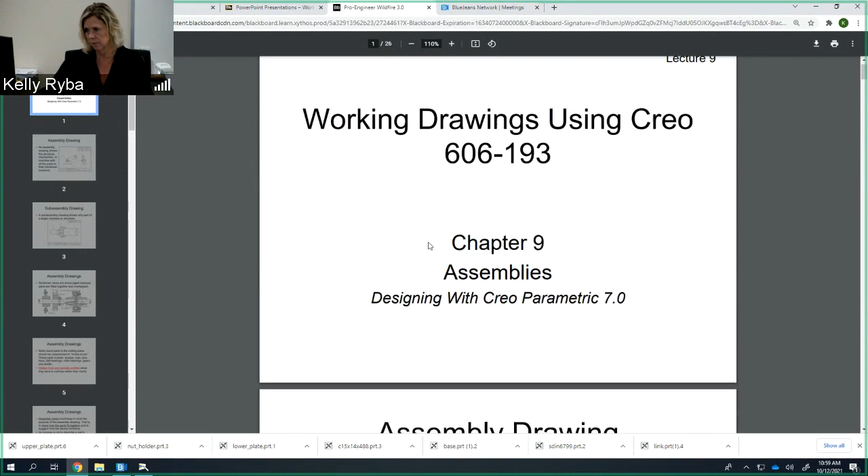If you want to open up to page 287, which is the start of this chapter, we're going to be looking at kind of section by section of what we see here. First of all, an assembly drawing is going to show how parts are put together to accomplish a function. So an assembly drawing here is going to show multiple parts put together. It's going to list what they are. We're going to have balloons so we know in relationship to each other where they're at, what their part number would be, and how many of them we're going to need.

We're actually going to be putting the swinging link together as our first tutorial in our chapter here, chapter 9.

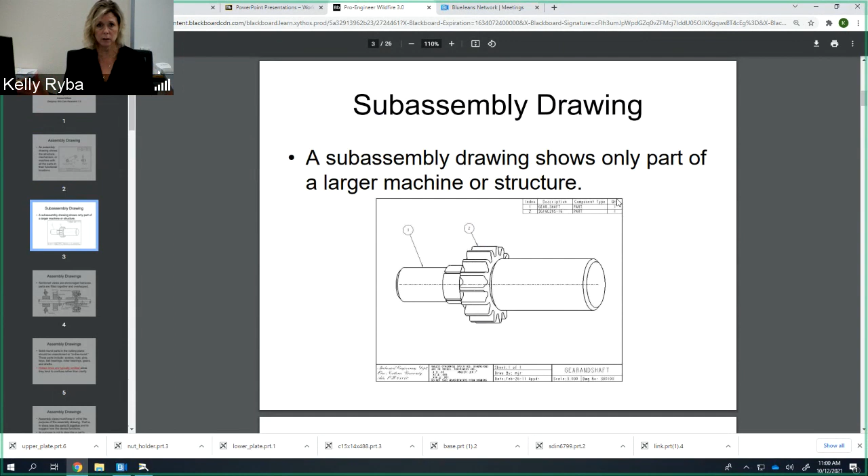Now, a sub-assembly is going to be looking at maybe a small chunk of a bigger part. So maybe we can put together a couple of small sub-assemblies before they actually get put into their final form to ease manufacture or assembly of the full amount. So sometimes when we have really large machines, we break it into sub-assemblies before it actually comes together to make the full machine assembly. Sub-assemblies are going to show a couple of parts or a section of a machine which then goes into a larger portion.

Now, assembly drawings can be sectioned so that we can see internal features. This particular chapter 9, we don't go quite that far. We're just looking at, okay, let's bring all those parts in, let's make sure we know how to get them oriented where they need to be so that we can have parts that are working together. But this is going to go that step further when we start putting them on borders and we start ballooning, looking at whether we can see all the parts that we need to. And if we can't, we may need to make sections so that we can see and balloon parts that would be internal to it.

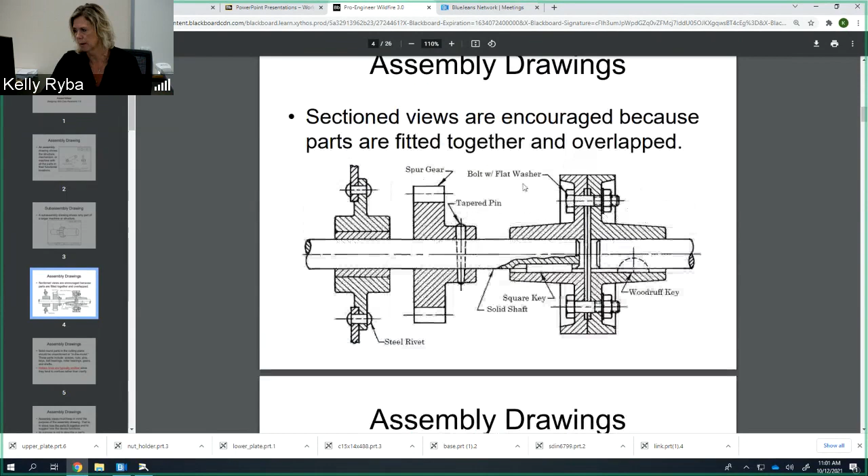Now, assembly drawings with solid round parts - for instance, if I have a shaft that is going through an assembly, and let's say I section through it, we do not use section lines on long extended cylindrical parts. And also things like screws, nuts, pins, keys, ball bearings, roller bearings, and gears as well. These are things that are kind of part of that dimensioning standard. We'll continue to practice these things as we go along.

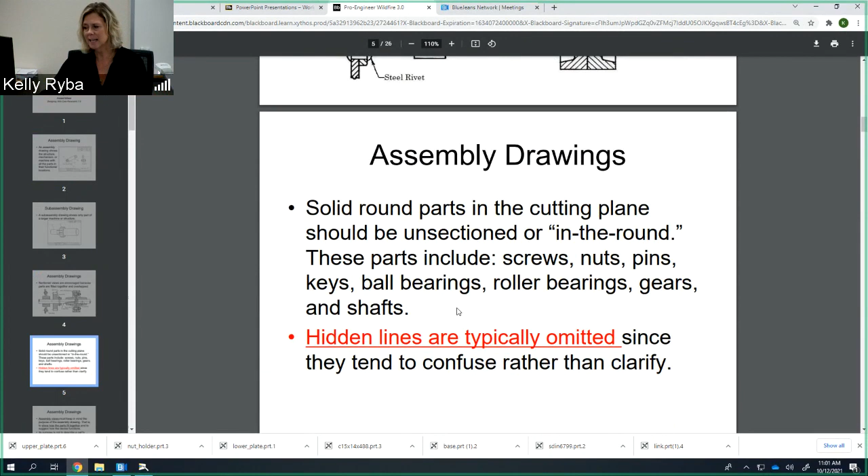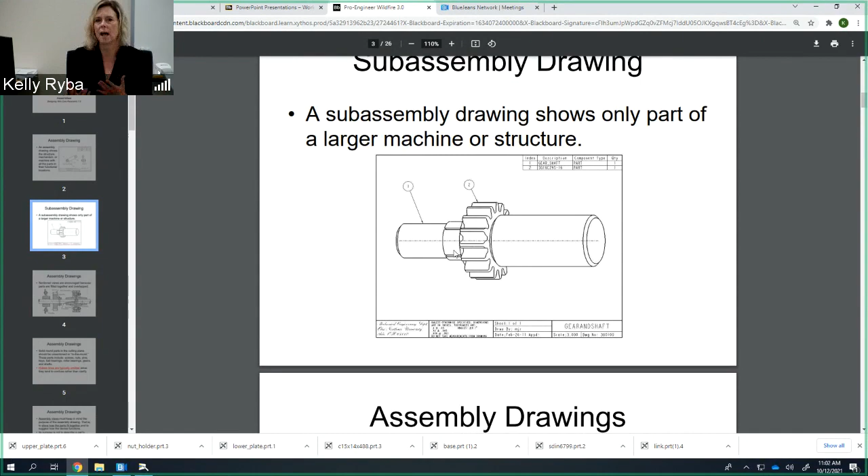Typically hidden lines are omitted, since they tend to confuse rather than clarify. If we start putting in all the hidden lines because we have multiple parts together, it would actually start to look kind of like a mess. So we normally will take out all of the hidden lines in an assembly view, and then if it seems like maybe we need to put a couple back in, we do it on an individual basis if it's going to add clarity to the drawing. But if it doesn't add anything, we leave them off. So the default is really to leave them off, but there's not a standard that says no hidden lines on assemblies. We only add them if they add value and clarity to the actual assembly itself. That's why it says typically omitted.

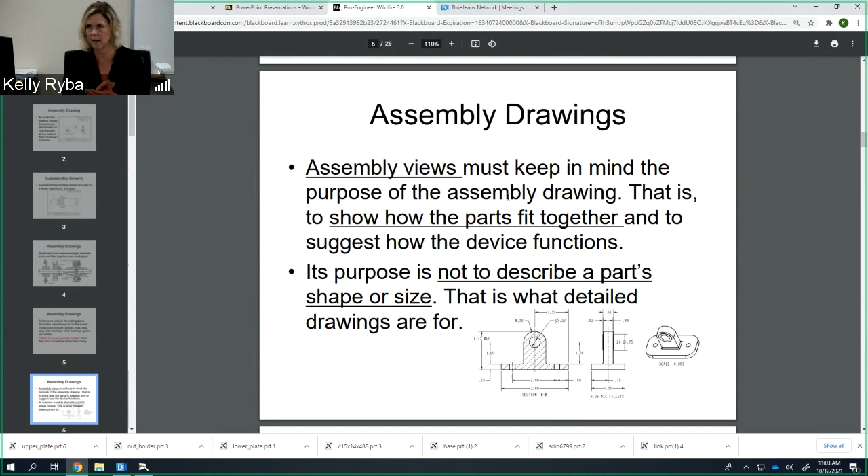Now, different types of assembly views - keep in mind that the purpose of an assembly drawing is to show how parts fit together and to suggest how that device is going to actually function. Its purpose is not to describe the individual parts. So there are no dimensions for individual parts on an assembly drawing - that's your detail drawing, which was what we looked at in our first Creo class. Now we're going to start saying, okay, we want this and this part to come together - how are they oriented to one another? That is the purpose of an assembly drawing, not to say that hole there needs to be a half inch, and what is the tolerance on that. That's detail drawing stuff - that's individual part stuff.

Dimensions are not given on an assembly drawing unless it is needed at assembly, for instance if there's some sort of a dimension that something needs to be adjusted to, that can be on an assembly after all the parts come together. That's something that can be on assembly, but we are not dimensioning other parts and what they look like on that assembly drawing.

Sometimes, once we put all the parts together, we may want to know what is the overall length, height, or width of that particular assembly. That might be something that you add as a reference to an assembly drawing.

Parts are going to be identified on an assembly using balloons, okay? So circles that are containing the numbers, we call those balloons. They're going to point to the specific parts and identify them in what we call the bill of material.

Bill of material, balloons, section views are going to come after chapter 9. That's actually chapter 10 stuff, when we start creating the drawings, putting the bills of material on, and preparing our assembly drawings to be used on the shop floor. Right now, chapter 9 is how do I get all these parts together?

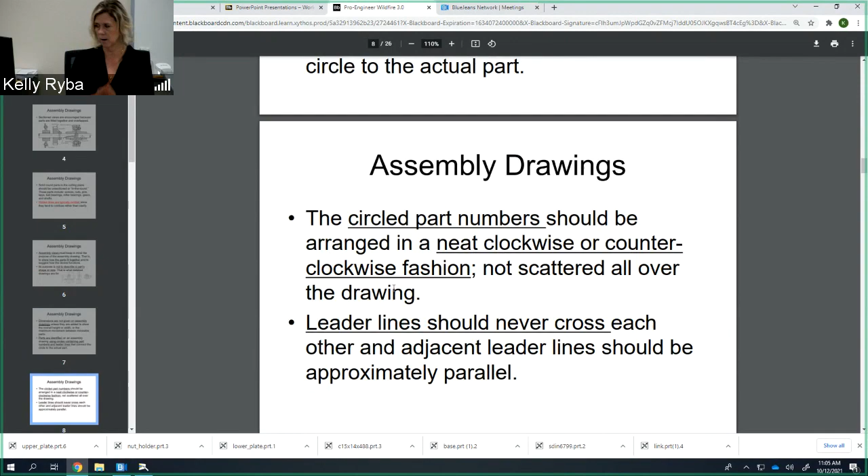Leader lines should never cross each other. So if it's a leader line coming from a balloon pointing to a part, no crossing of those, that's not okay. They should be, when appropriate, as parallel to each other as possible.

The bill of materials must be provided on an assembly drawing, as we talked about. It's not going to be the focus here of chapter 9, but it's going to be that listing of all the individual parts that we would have pulled in, which are now identified through balloons and then quantified on that bill of material.

The bill of material always needs to have that balloon number, the part number that we actually have on there, how many there's going to be, and then a description. Sometimes we put material on there. I'm not a proponent of that, because if you end up switching material, now you've got another place that it has to be identified.

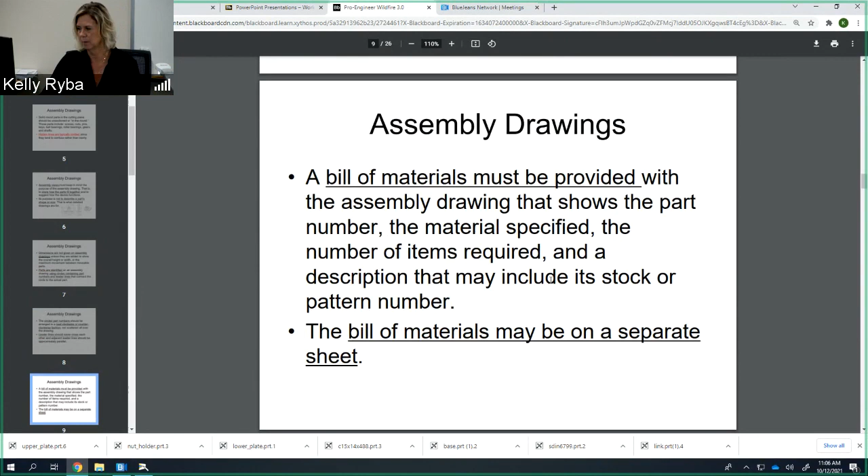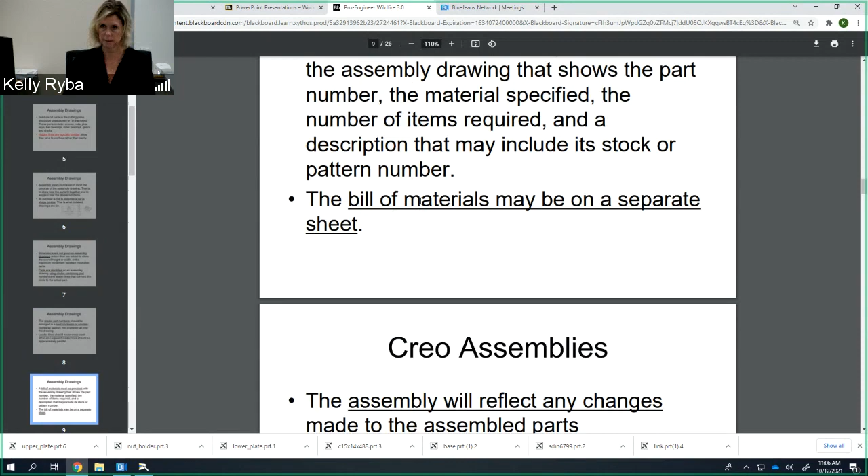We'll talk about the requirements. Bills of material can actually also be on a separate sheet of paper, but we're going to be creating ours so that they're right on the assembly drawing itself.

So in Creo assemblies, the assembly will reflect any changes made to the assembled parts. For instance, if any changes are done to the individual parts, they will be reflected in the assembly automatically. That's the parametric part of Creo parametric, meaning that wherever I make a change, that change is going to cascade over into all of the areas where that part is used.

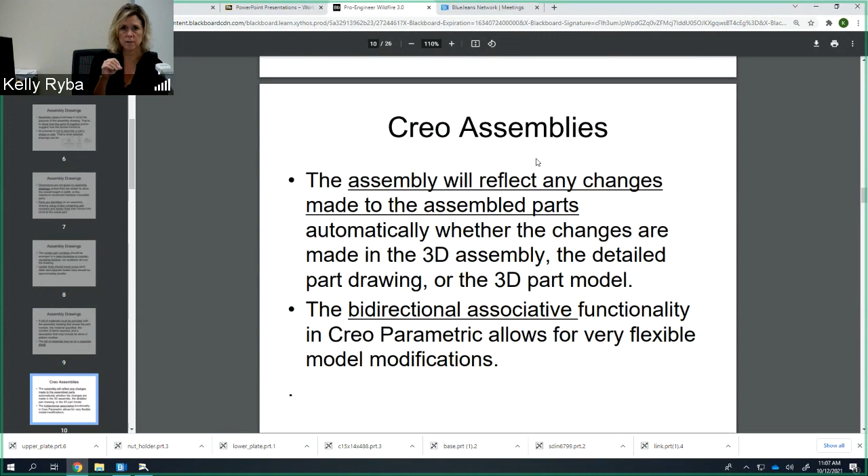Bidirectional associativity is also one of the functions of Creo parametric, and so we can make changes in the actual assembly, and they will cross over back to the detail drawings. That is one of the huge benefits of parametric software, is that ability.

The best way to assemble a machine or structure is to do it in the same way it's going to be assembled in the real world.

So you got to think about what is the first part I'm going to grab so that I can actually get things going. There's usually going to be something like a base piece, and that becomes the first number we assign on our bill of materials, so we create the bill of material in the order we're going to assemble it. That's what we do when we pull parts in. Understanding how parts are made and how they're going to be assembled, thinking about that assembly process is really important, because Creo is going to mimic that very same thing.

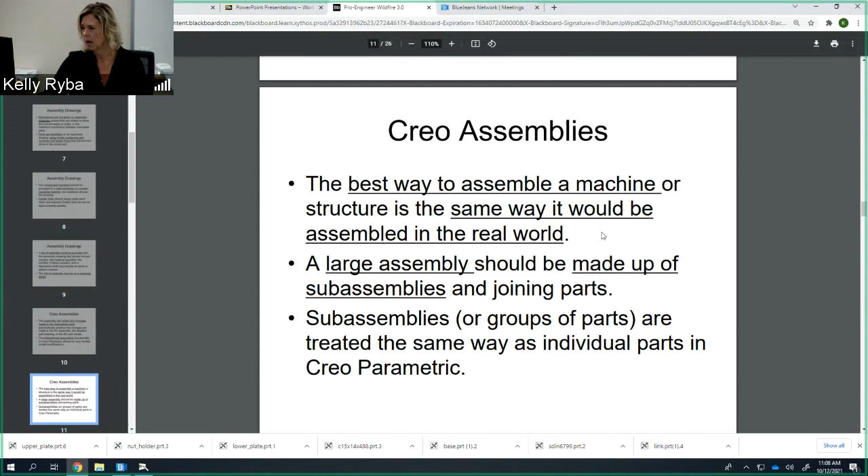Sub-assemblies or groups of parts are going to be treated the same way as individual parts in a Creo assembly. So if we bring a sub-assembly in, it kind of becomes its own part, and then we apply the constraints as appropriate for the positioning.

Parts may be colored in an assembly to help distinguish between them, and I'm actually going to demo that in our particular assembly today, so you'll see me do that so we can see that differentiation of the different parts.

All parts must be in the same working directory, we can't have parts off in different directories because it's always looking to that working directory. So when we start any session, just like it was for part generation, for assemblies as well, we're going to set that working directory right away.

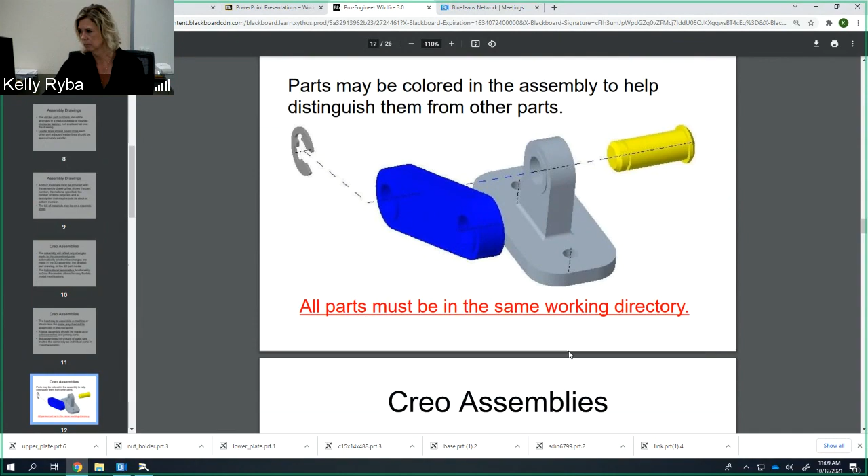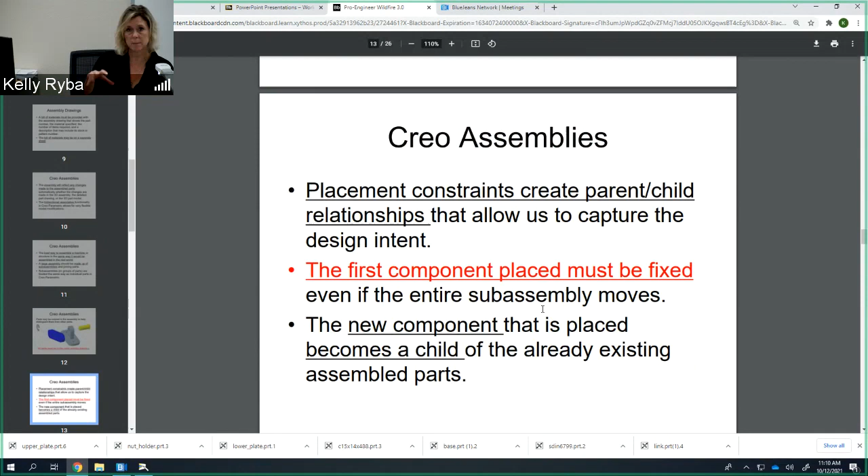Creo assemblies are going to have placement of constraints that create these parent-child relationships. So starting with that base piece, that first component has to be fixed in the assembly, even if it's moving in its final function. We'll see how we do that in each of the assembly tutorials. Then a new component is placed in and oriented to that base position, and it becomes, if you would, the child of that assembly. So the first component must be fixed, and I'll show you exactly how we do that.

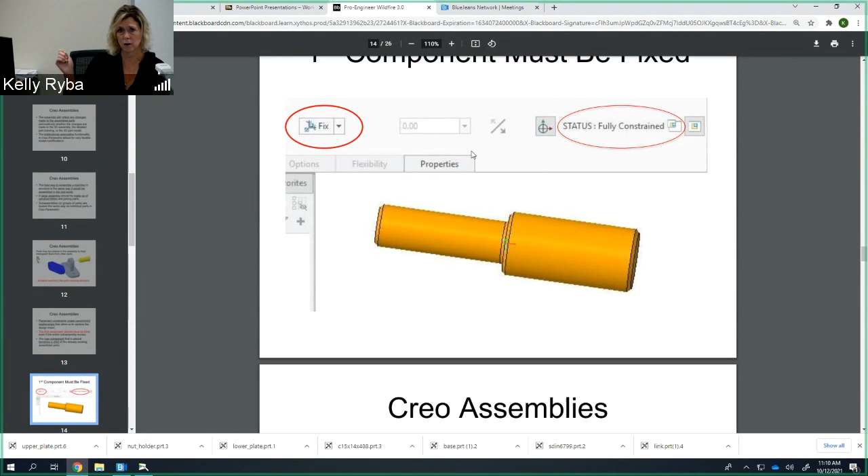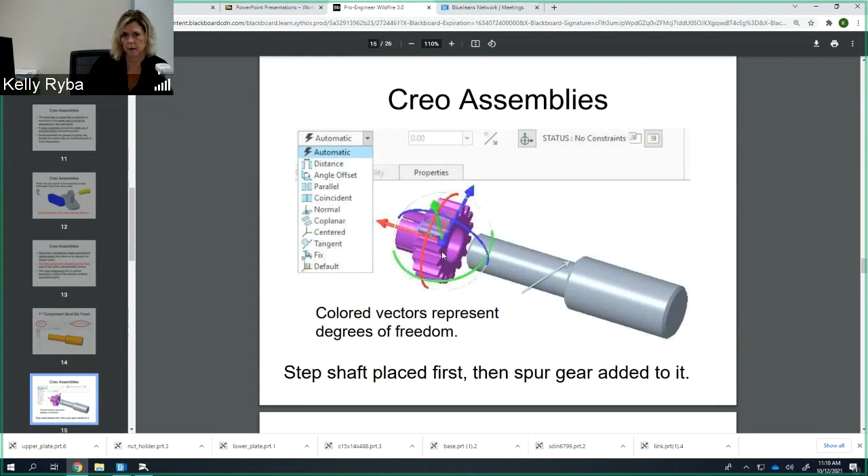When it's fixed and it's just like in space, it's going to be fully constrained, and we hit our green check mark, then continue on after we place that very first item. Then once we decide to pull in another element, say on the end of the shaft, we're now going to put a small gear. Through that, there's a number of different ways we can accomplish it - there's automatic, there's distance, there's all these different types of constraints. We'll be talking about a number of them, but the most popular one is coincident.

We can make coincident an axis, planes, surfaces, datum axis, datum planes - it's very, very versatile. So we'll be using coincident quite a bit. Distance is another one where if we need the parts coincident but offset by a little bit of distance, we're going to be seeing how to use that as well.

Once a part comes in and is ready to be oriented to the assembly, you'll notice we have these circles going around, and lines as well - they're red, blue, and green. These represent 6 degrees of freedom that any part has when brought into an assembly, and we need to nail those down. We need to figure out rotationally what orientation this should be in to the other part we're mating it with or constraining it to. What surfaces may need to come together, what axes need to be lined up with one another. These little arrows help us get it close to where it needs to be, and then we finish it off with the constraints we're going to be applying.

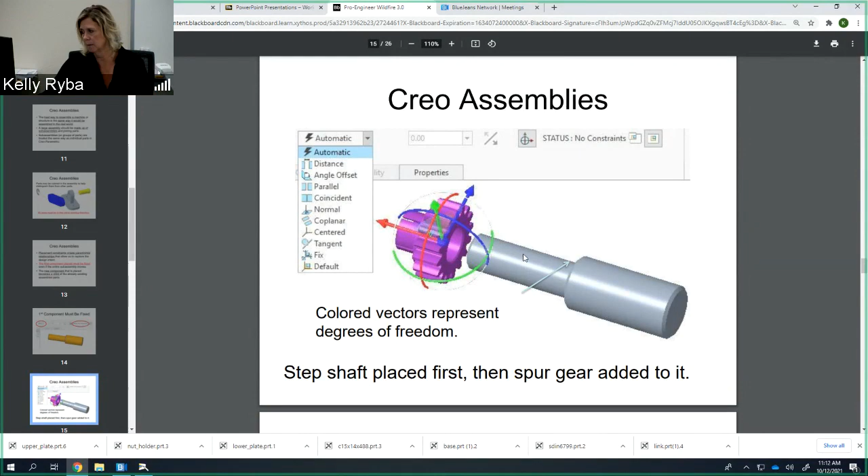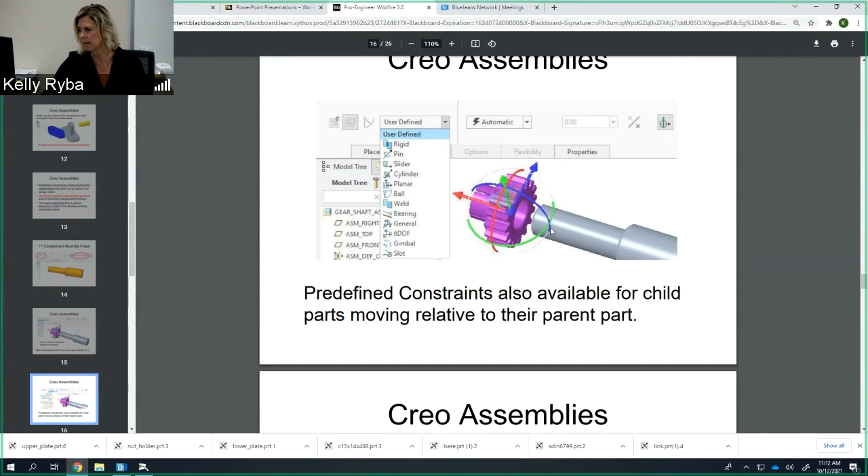We can also accomplish some of this through identifying canned ways of putting parts together. One of them is a pin, which gives something the ability to rotate about an axis. We want this gear to be able to rotate relative to the shaft. We're going to have our link on our assembly, and we want it to actually rotate when it's on that pin, not be fixed. It has to have the ability to rotate, so we can test that once everything is assembled.

The most popular constraint available to us is coincident, and we can do that in terms of an axis, a plane, and or surfaces. You can over-constrain things, but we want to stick to what is the final function, or how we would set it up if we were trying to align it or put it in position. That's what we'll default to as the starting point for each part we put in place.

PTC, or Creo, recommends a limit of 10 constraints between 2 parts, but you can really have as many as 50, as it's said in the book.

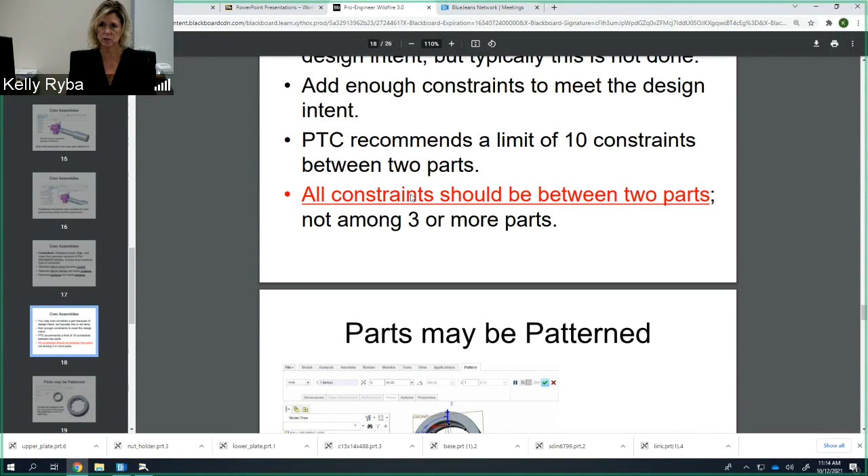You'll get a message when you are fully constrained. You might put one constraint on and it's going to say we need a little bit more—we don't have our green check mark yet. As soon as you put the second or third constraint on, depending on where it's at, you're ready to do the check mark and say, yep, we're good to go.

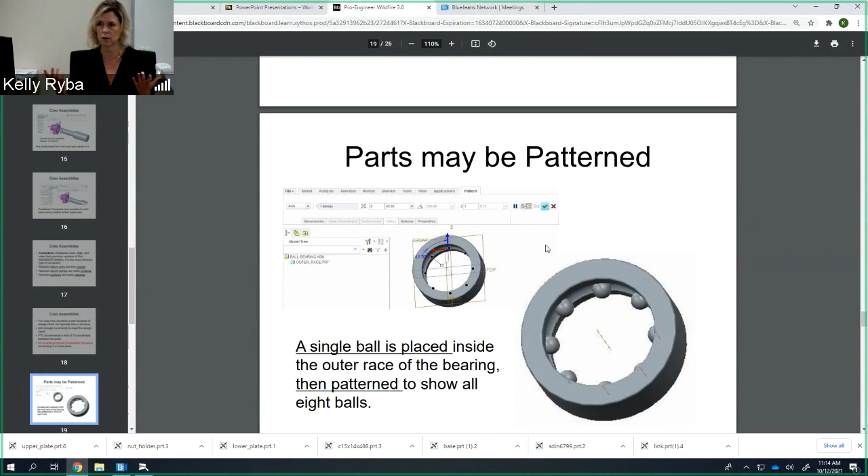Parts in an assembly can also be patterned, just like we did features on an actual part. One of our tutorials is creating a ball bearing—the balls inside are their own individual part within the outer race, the groove on the inside, but we're going to position them evenly around a center. We'll use patterning similar to what we did for part patterning, but in an assembly form.

Now here are sub-assemblies and assemblies. Through the tutorials in Chapter 9, we're going to create this sub-assembly, the take-up frame assembly, and this ball bearing. That ball bearing is then going to fit inside the take-up piece itself. Then these come together in the final assembly—you can see the frame, the take-up piece with the ball bearing, and then a screw rod that goes back and forth to do the adjusting we need.

This is going to be a full assembly that we create. We call it the complete take-up assembly. It's going to be something that we work through.

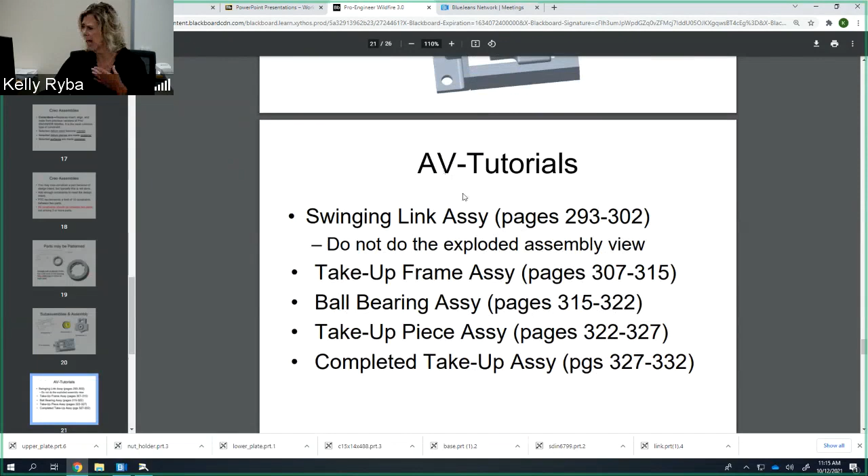Now, I have the wrong name here for this—this is not going to be called AV tutorials, these are going to be called Chapter 9 tutorials. I was playing around with what I was going to call these learning plans, and in our last class, when learning plans were made up of chapters, the chapter numbers didn't align with the learning plan, so sometimes I was confused which chapter we were on in the book. So I ditched the learning plan naming—this was kind of in my transition phase. These are actually going to be Chapter 9 tutorials.

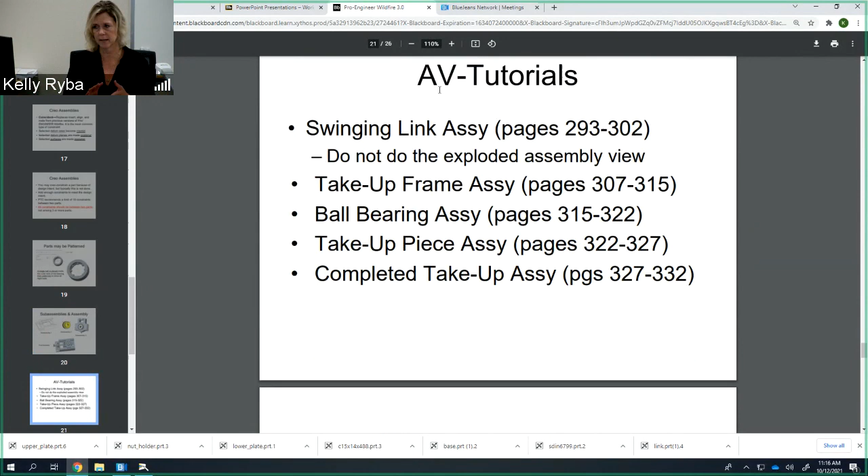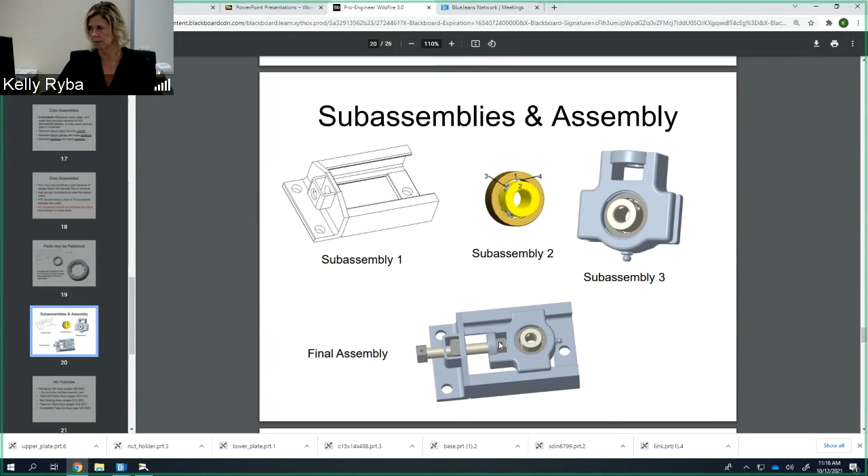There are 5 of them: the swinging link assembly, the take-up frame assembly, a ball bearing, a take-up piece assembly, and then the completed assembly like we saw. So there's one extra to what you see here—there's going to be 1, 2, 3, 4 assemblies plus the initial swinging link that we're going to be doing, which we actually saw earlier.

There's the first pages here of the text, through page 292, only because it gives us a really nice overview of the different constraints that are out there. We may not be experiencing all of them in this chapter, but you know that they're out there and will probably be coming up a little bit later in other assemblies that we do.

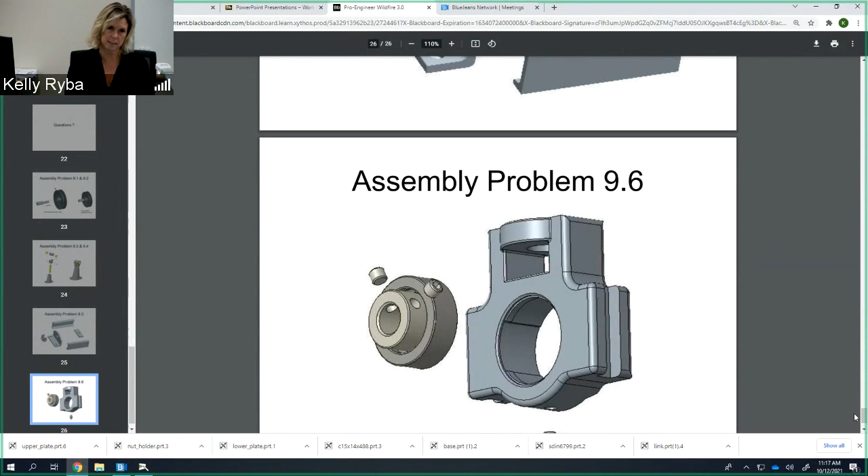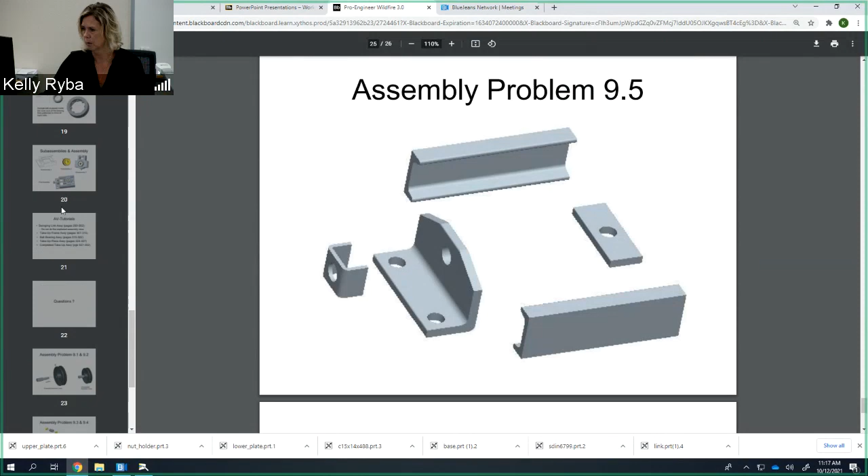Any questions right now on the parts, or the first part of Chapter 9 here? Okay, all right, I'm going to scooch over here.

We're going to stop on my PowerPoint at that point. What I want to do is go back a level and show you the information that we have here. So you'll notice that underneath our PowerPoint now, we do have Chapter 9 tutorial files.

What I've done is, over here, if you click on that particular folder, you're going to find each one of the files for each one of the tutorials that we're going to do. So the swinging link assembly parts are going to be these 4 parts that we see here.

Now, to access these parts, all you need to do is download each one of these. My hope is that you can download just by clicking them. Now what I want you to do is watch.

Down here at the bottom of my screen, you'll notice that I have a parentheses 1, and the previous one did a parentheses 2. The reason for that is because in my download directory, I already had these saved. So when it sees another one, it doesn't save over the top of it, it just makes another copy of it, but puts the parentheses in there.

Now what you need to do is get all 4 of these into the same working directory. And if maybe you didn't download it the first time, and you backed up and decided you want to start over, you're going to download them again and end up with parentheses 1s or 2s in back of the .prt. You need to rename those and get rid of those parentheses, because otherwise it's not going to recognize it as a Creo file.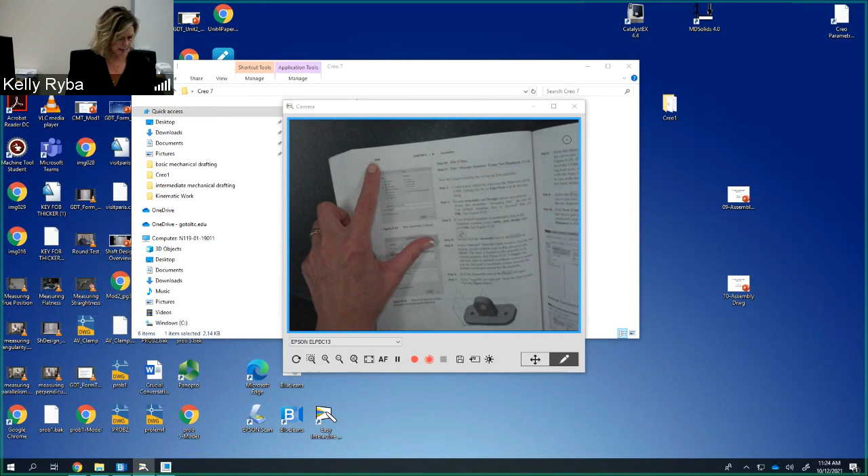So where we are starting is not at the very beginning, but on page 298, step number 1, once I get everything pulled up. We are just not downloading that part. Okay, we're just not downloading that part. So let me start over.

New, I want an assembly. Design is going to be clicked. And my file name, we're going to call this, and I always do all caps, swinging link. I think I have a couple versions because I've been playing around with this. I'm going to call mine with a 3 in back of it because I need it to be new. Then okay.

All right, now what we're going to do is we're going to start by pulling in our first part and setting it as the fixed initial part that's in here. Remember, even if it's moving in its final form, since it's starting our assembly process, it has to be fixed.

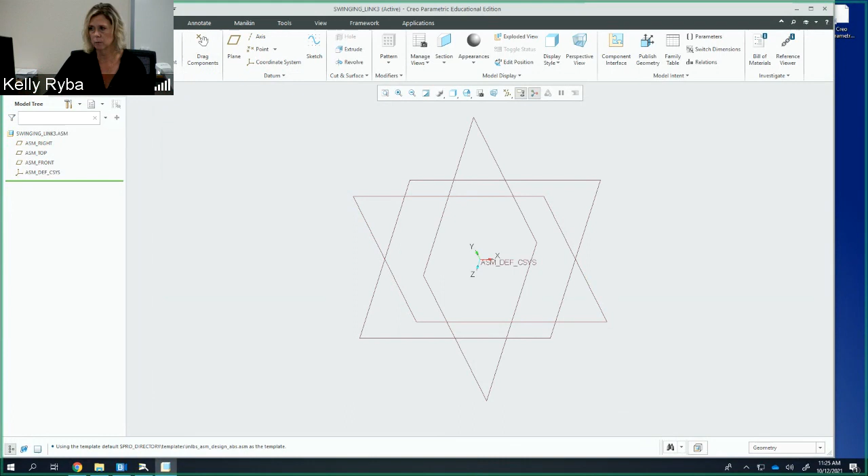So I'm going to go up underneath this model tab, and we're going to hit the assembly icon, or assemble icon. Then I'm going to pick the part. My part is called base.prt, already created for us. And then we're going to hit open. Okay, and now it goes right into component placement, you see that here. In component placement, there's not much to do here because this is our first one. It says user defined, but I'm actually not going to use that one.

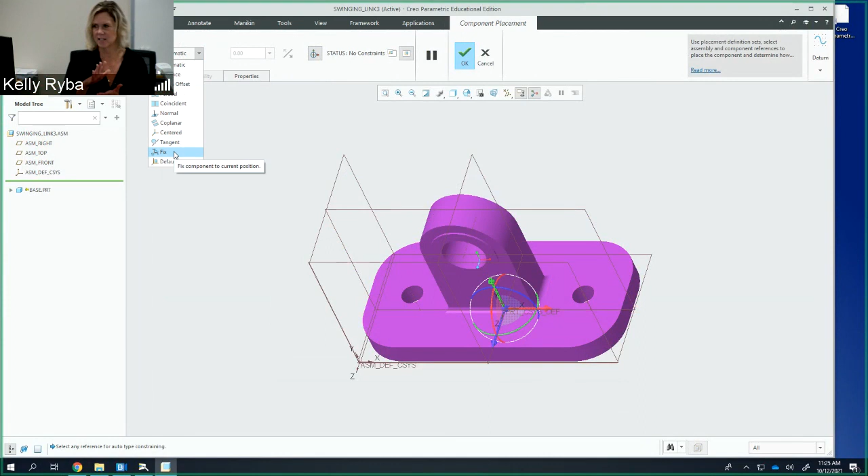Wait, not that one, it's going to be under automatic here. I need it to go to fix. Okay, it's going to be on this second one, so I'm going to do fix. All I do is actually nothing - I can either hit the green check mark or the middle mouse button to say, okay, we're fixing it. That's the first one, and it identifies it as our first one.

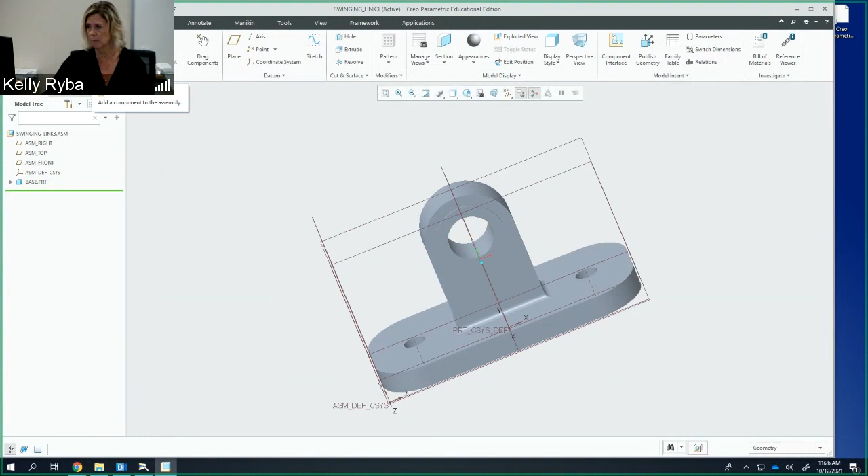Now what I'm going to do is pull in my second part. I'm going to hit assemble again. This one is my clevis, which is right there.

Now, if you pull it in and it's like the second time it was brought in, if it has that parentheses 1 in back of PRT, it will not populate here because it's not one of these file formats. I made that mistake - I'm like, wait a second, it's here, it's not here, and it had the parentheses 1 in back of it. So when you transfer them over to your working directory, make sure that if it was a duplicate and it created that part with parentheses 1, 2, 3, whatever it might be, that it's not in here. You want to rename those so they populate, because it's only going to see .prt, not .prt parentheses 1, parentheses 2. And I'm going to hit open.

Now what has happened here is you'll notice my part is purple when it comes in, and I've got all these little things on the back side of it. These are my degrees of freedom that I can move this part with. So I've got this global one that goes around this axis that it can rotate - that's one degree of freedom. I've got another one that goes around this axis, that way. And then my third one is... oopsie.

Lost it, I hit the middle mouse button. I'm so mad at myself. So let me bring that clevis pin back in.

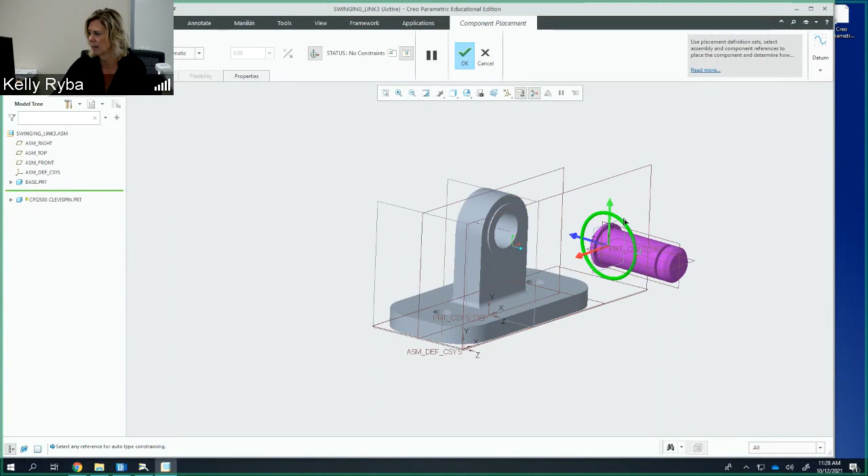So I can rotate this way, and I can rotate this way. I left mouse button and drag, and then release. And then I can rotate - which one was it - the blue one, this way. So that's three degrees of freedom. And then I can translate vertically, horizontally, and all I'm doing is clicking on each one of those arrows - this one goes horizontally, and this one goes in and out. So practice that by picking with your left mouse button and dragging, whether it's rotationally or translationally, and then releasing when you get it where you want it to be.

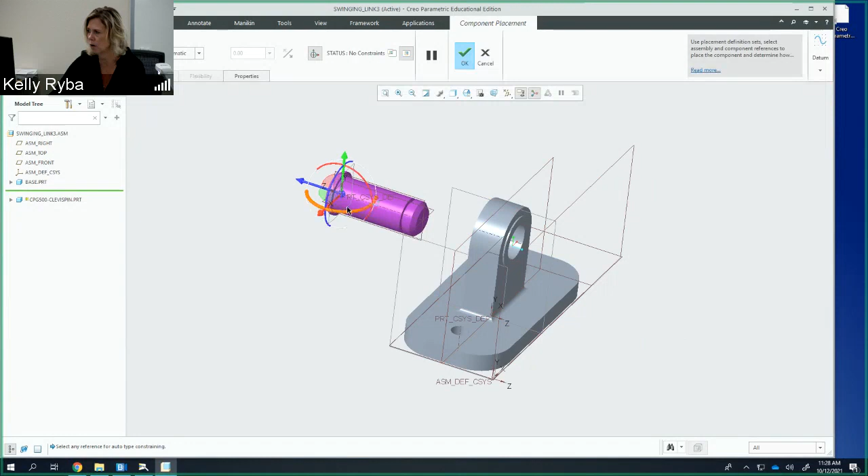And this is how we kind of place it-ish, okay? Now, again, if you end up doing what I did, all you've got to do is cancel out of this - you're like, oh crap, I'm confused here, I don't want it where it's at, and I just want to start over. All you can do is hit cancel and then re-pull it back in. That's all you've got to do.

All right, so this is here right now. Now I don't have anything placed, so you'll notice here that we don't really have anything, and the status says no constraints. It's not going to let me really do anything, so I want to place it.

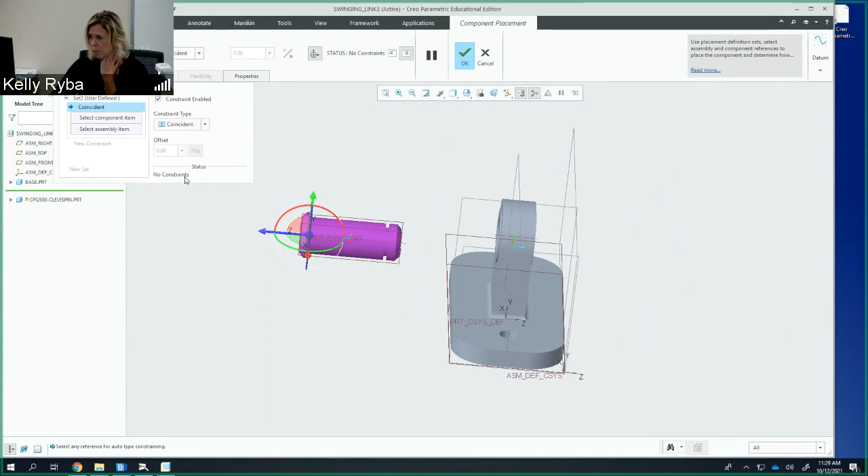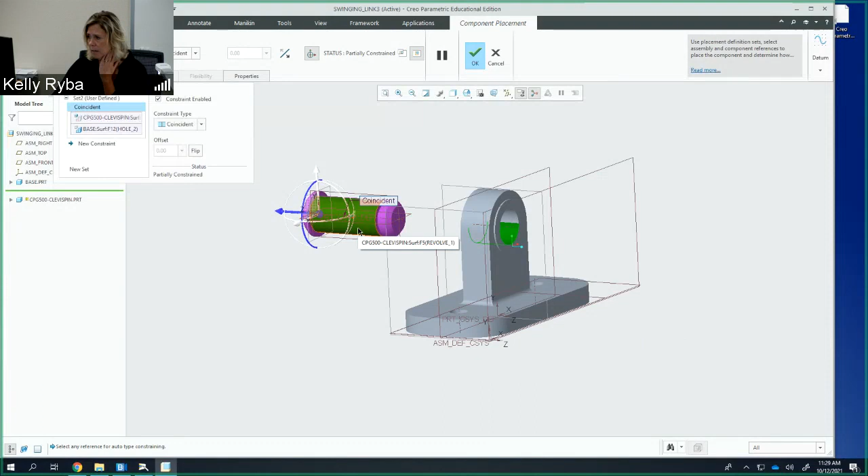And I want this to be a coincident placement - coincident. I'm going to rotate this around a little bit. There's a couple things I'm going to do. First of all, I want the outside of this pin to be coincident with the inside of the bore on my base. So I put those two coincident, and all I did was select the outside surface of that pin and the inside surface of my bore, and it put those in line with one another.

Now the other thing I need to do is position this so that it's inside of here, right where it's supposed to be. So the other surface that I want to be coincident - I'm going to add a constraint. I need to add a new constraint. I've already got one that is coincident, and I'm adding my new one. Now it already goes back to automatic.

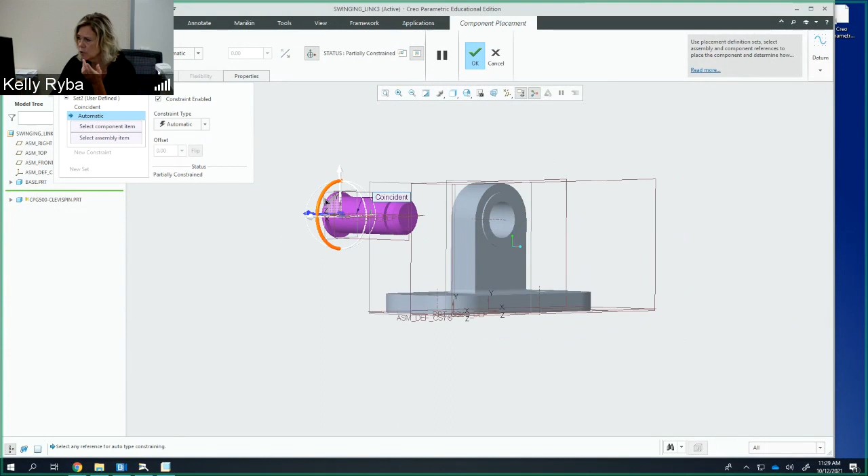You can try automatic. Sometimes it's kind of smart about that, but sometimes it's not. So I'm going to try automatic. Click there at that surface, and then this surface right here. And it wants to do distance.

So it wants to set up for me, like, how far apart should these be? You could put a distance of 0 in there, and that would make it coincident. Or we can do this. We can say, instead of that, let's do coincident, and it moves it into the position.

Now, sometimes automatic works really well, and sometimes it doesn't. So it's not a bad thing to start with automatic, because it could be really helpful, but sometimes it's not as intuitive as you would think.

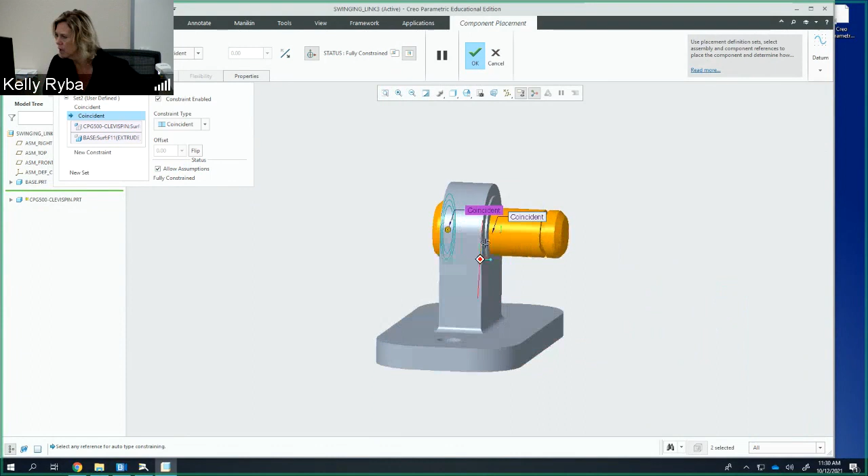Okay, let me get back over here. So that is there. Now you'll notice up here it says status is fully constrained. So I'm on the same axis as the bore, and I'm pushed into position. Okay, so fully constrained here. I can hit the OK or my middle mouse button.

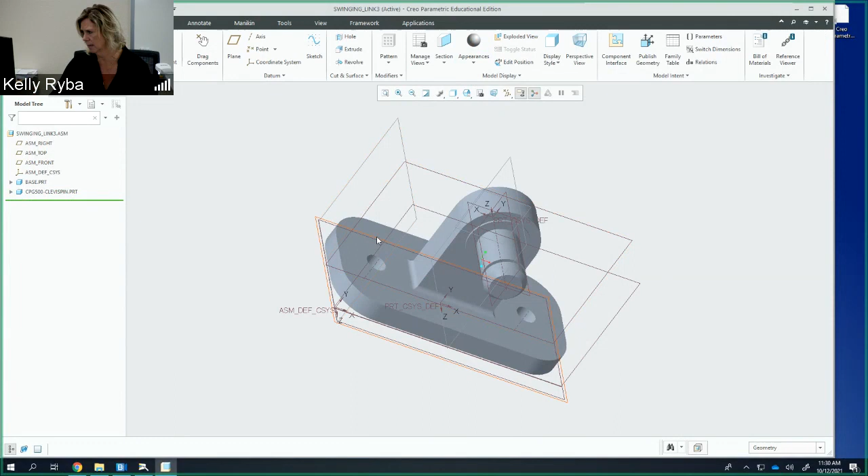All right. Now what's happened here is I'm going to position this like this. What's happened here is that everything is all the same color, and what it looks like to me is that it's all one piece, right? So we can actually change the color as we go along, and you're going to see me do that so I can distinguish between the different parts.

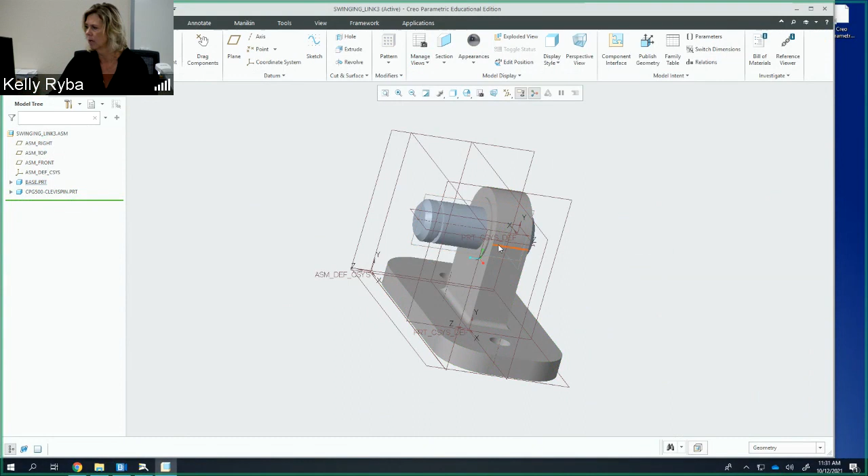So I could change the base if I wanted to by just selecting it, and then up here where it says appearances, I can change the color if I wanted to. So maybe I want to make this a little bit darker. Okay, you'll notice that it made this now a little bit darker shade than what the pin was.

Now I'm going to go on my clevis, and I'm going to do the same thing. I'm going to highlight it. I'm going to go up to appearances, arrow down, and I'm going to actually do it in yellow. Okay, so then I can really see that difference. So play around with the colors and stuff there if you want to. You don't have to, it's not part of the assignment, but just know that you can do that so you can see the differentiating qualities of it.

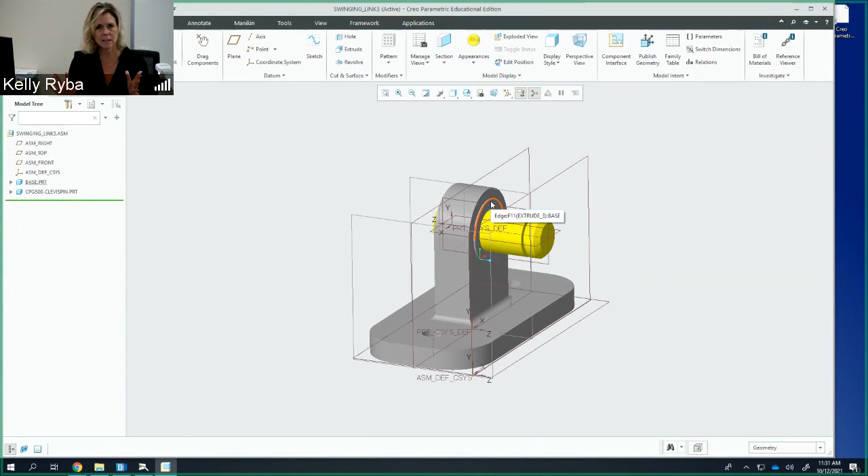Okay, so these are my first two. I can do a save right now if I wanted to, and it'll save it in that working directory under the file name that I gave it. But I'm going to keep working, all right? I'm going to tempt fate, and I'm going to hope for the best. But I do encourage you to save. Again, save every time where you're like, I don't want to redo what I just did. Save, okay?

Now, I'm going to be adding in my link in here. So the next thing I'm going to do, I'm going to go back to Assemble. I'm going to find my link.prt, all right? And I'm going to open that up. Okay, so here it is, and it puts it in this position.

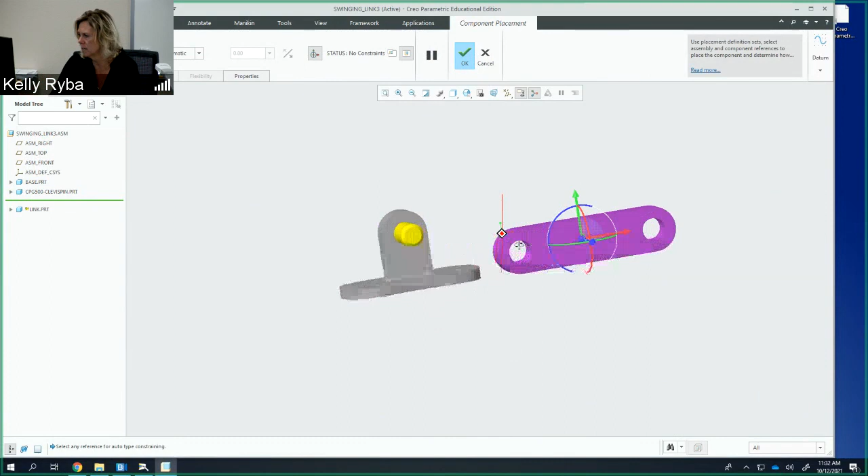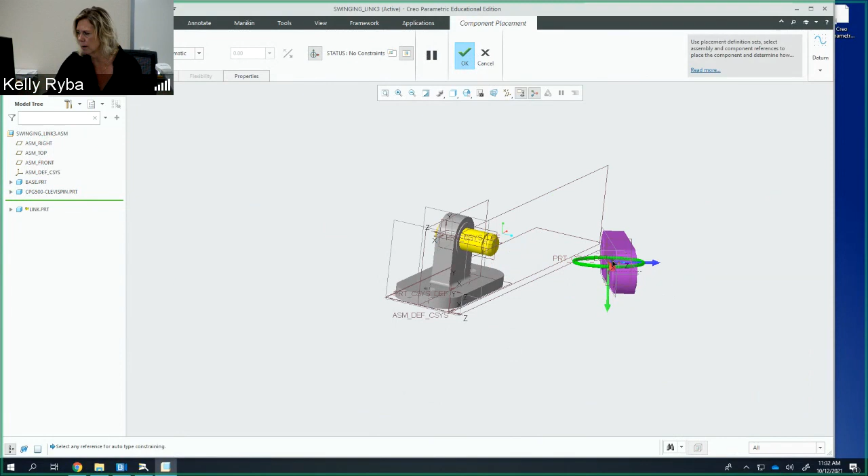Now again, I have that ability to kind of get it close to where it's at, because sometimes it's not going to be on the right plane or in the right position. So I may want to translate it in and out here so I can see a difference, or up and down, or I might want to reposition it. Look at it, it goes over this way. All right, it doesn't have to be perfect, but sometimes we want to just make sure that it's close-ish to where I want things to be. And it's kind of fun to play around with it.

All right, so now I've got these two guys in position here. Now as I look here, I'm ready to place it. I have no constraints in play right now. That's what it says here. I still could hit OK and just have it floating out there, but this is an assembly. I gotta put it with the other parts over here. So I'm going to do my placement.

And there is an automatic option here. I can do that. So I always like to say, try it, see what you can do. So I'm going to do the outside surface of that pin and the inside surface of my link. Okay, so it lined those two up. It lined those two up.

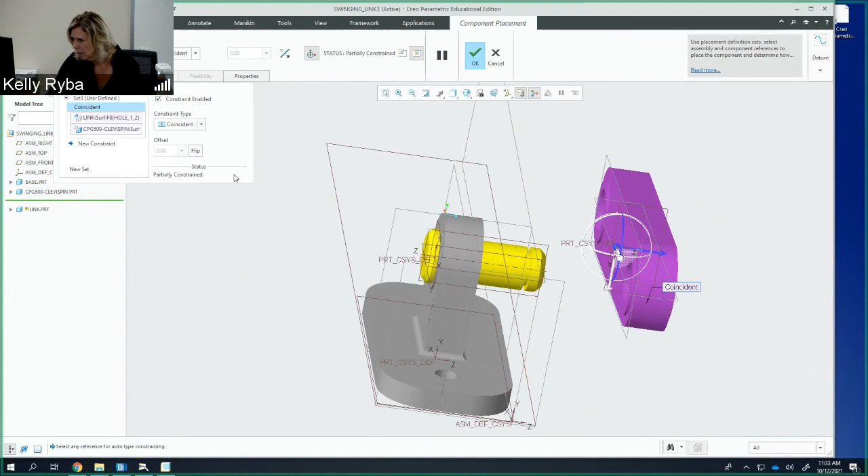So if I look down here, notice that they're lined up. Now what I want to do is another constraint - they want to pull this in, but they want there to be a gap between the offset surface right here and the offset surface in here.

Now I believe if I go onto this, I should be able to edit definition and get back in there. Yes, okay, so if you do end up with that, you can go back in like this. Placement wise, it's going to remember that set that I just took originally.

So now I'm going to do the next one here. I want this to be - now this is going to be distance this time. Of course, I have to apply a new constraint first. Now I'm going to select distance. Where is it? Right there, okay?

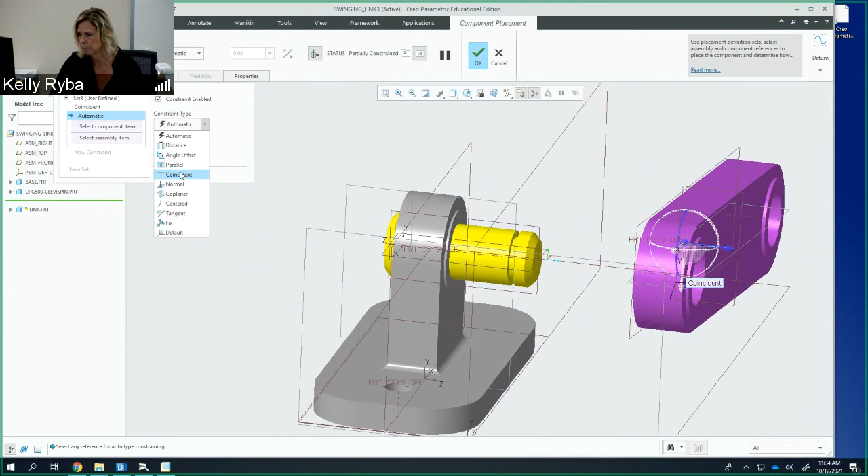And what I'm going to do is select the surface on my base right here, and I'm going to then have the ability to move this around, and select that surface right there. Now, currently, my distance right now is 0.01, so it's identified there.

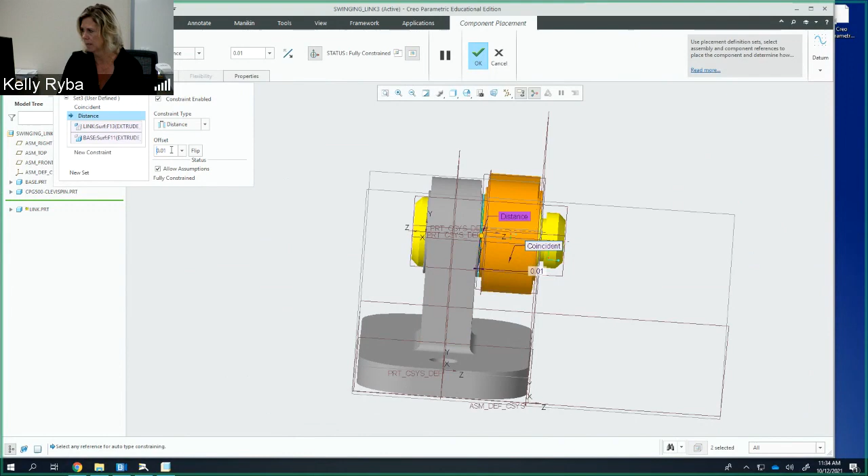I want it to be, the book tells me, 0.01. Enter. Now, if I zoom in here, zoom, zoom, zoom, notice that, yeah, it's not right on top of it. There's this little bit of a distance of 0.01 right there for a little bit of play between those two surfaces, okay? All right, so that's there. My link is in place.

Oh, you know what I didn't do? I didn't do this. Now, I wonder if I can go back and change this right now. Let me go up here. Let me go to user defined. It's a rigid. Dang it. All right, this just means, you know what?

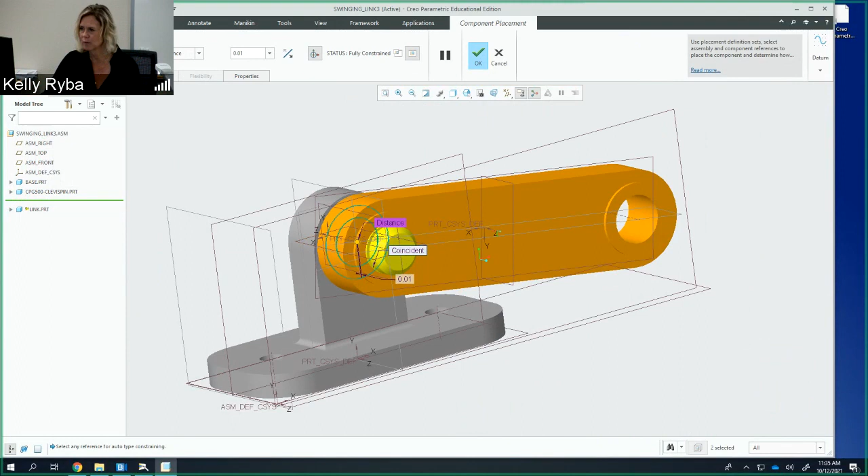I'm going to cancel this. I'm going to pull this back in. Do you really want to cancel? Yeah, I do, because I didn't do one thing. I'm going to be on my link here, and I'm going to edit definition. I'm going to see if I can do it here. I don't want to be user defined. I want to be a pin, because I need the ability for this to actually rotate about, okay? So on this link, I need that ability.

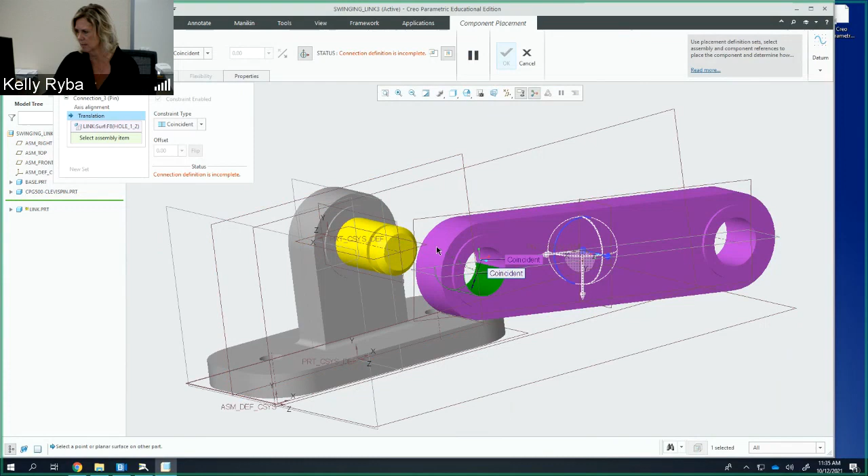And now what happens is it says, okay, I want this surface to be coincident to this surface. All right, so it lines that up. That one's there. And then what I need is I need to add an axis alignment, this one. I need to do the translational now - translational is going to be how far back and forth do I want this, okay? And I want to have not a coincident... there we go.

And then I need the new set - I'm pretty sure I'm going to do between here and here. I think I have to start over. I'm sorry, I'm going to X out. I tried to do something I wasn't sure of. Do you really want to cancel? Yes. Let's pull the pin back in, or that link back in, completely fresh.

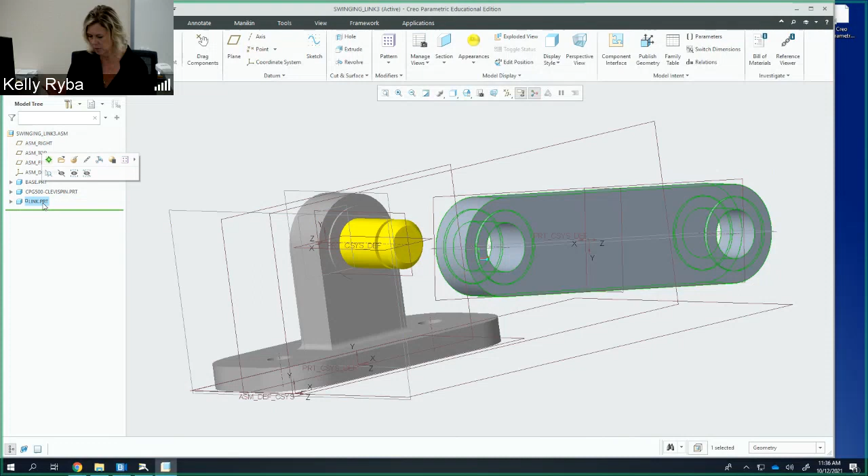I'm going to delete it out of here. Yes, I want to get rid of it. And let's reassemble, brand new link, pull it back in. I'm sorry, thought I could maybe edit the definition, but it wasn't as clean as I was hoping. So right now, before I do anything, under user defined, I want this to be a pin. Okay, I want that to be a pin because, again, I need it to rotate about that center, not be rigid and fixed. Otherwise, the assumption is rigid.

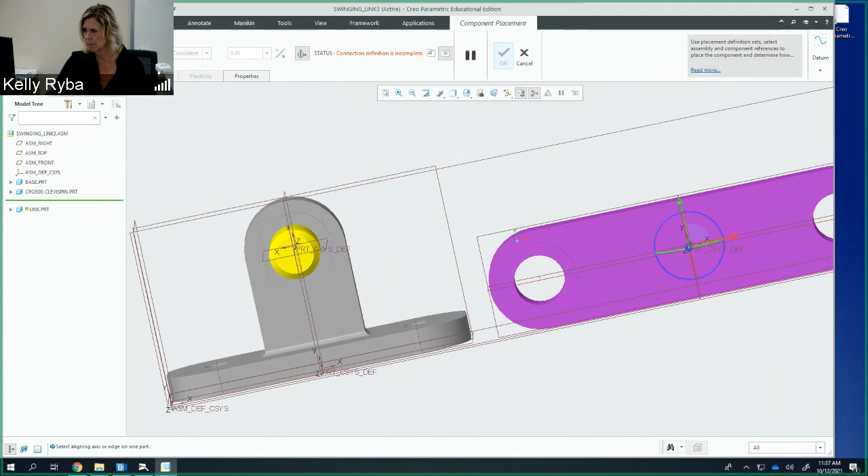So when I do that, I'm going to go to placement, and I need my axis to align. So I'm going to put my axis right here, this guy right there, in alignment with this axis. Notice when I get close to it, it actually is going to highlight.

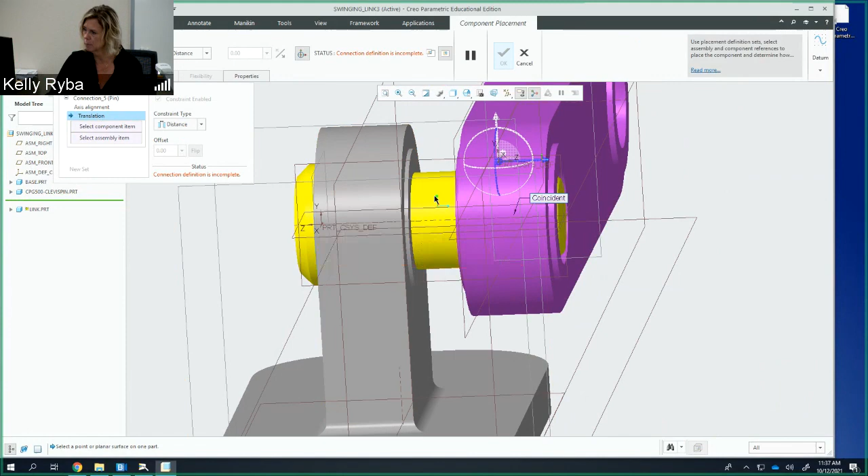Now what I'm going to do is I am going to do not a coincident translation, but I need that distance in there. So it automatically has it here because I'm in pin, and I could select it where I was, but I'm going to do this surface, rotate that way, this surface. And now it has 0.00, but I actually want this to be 0.01, and then enter, and notice it pushed it back just that little bit. That's the right way to do it as a pin.

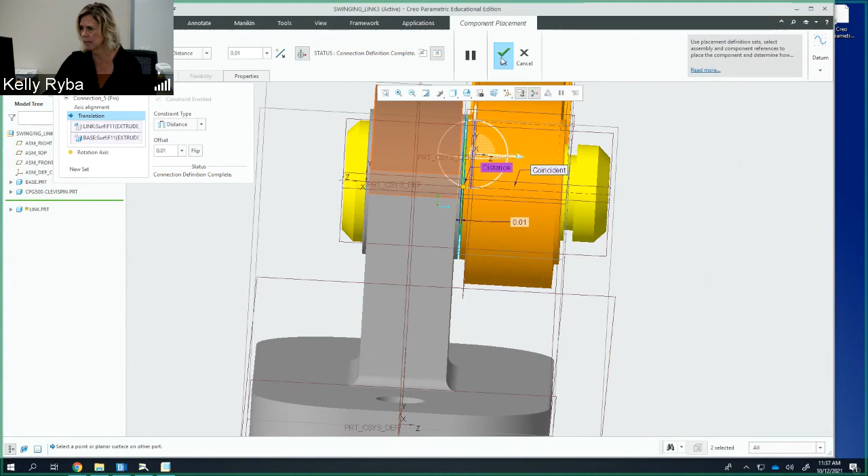Now, why do we want it as a pin like that? I'll hit OK here, and I'll tell you why we want to do it. Number one, I'm going to select this and change my appearance, making it red to start off with.

But now, to know if that pin worked or not, I can hit this drag component. I'll say I want to select one item, select the link, and now I can go back and forth. I'm not clicking anything, not holding any mouse button, but now it offers this ability to rotate.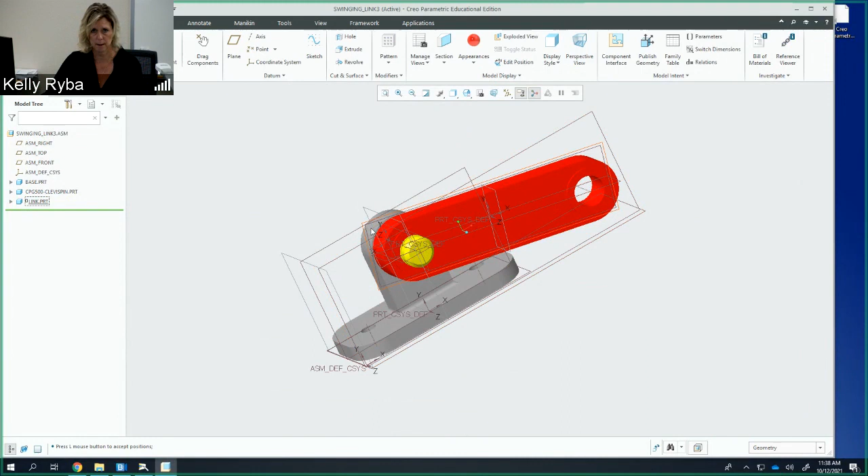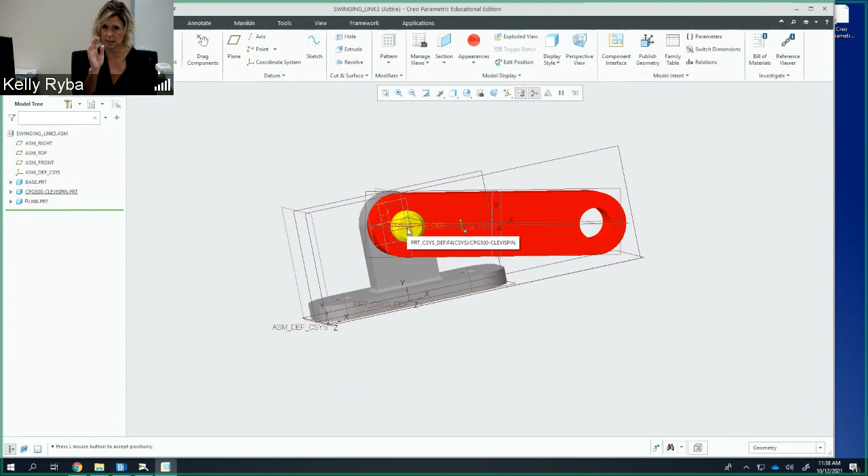If I try to do that with this pin inside of my base, I can't. It wouldn't be real apparent because it's a round part with no extension off of it, but it's rigid in there. That pin isn't moving anywhere, but my link has this ability to move relative to that rotation. So when you need something to move like that in its final form, identify it as a pin, because then it'll line up the axes and you can get your translational, in this case, from that offset distance.

Okay, we're not quite done yet. We have one more piece to put in that always gives me a little bit of trouble, so I'm hoping it's going to cooperate this time.

This would be a great place to save. I might as well. File, Save, and it's going to use that default in my working directory, so I hit okay. It's going to say it didn't regenerate the model, but we'll do that at the very end. Now I'm going to assemble one last piece in here, and that's going to be my SDN6799.

This is my retaining ring clip, okay? So I'm going to open this, and it's going to have it over on the end here.

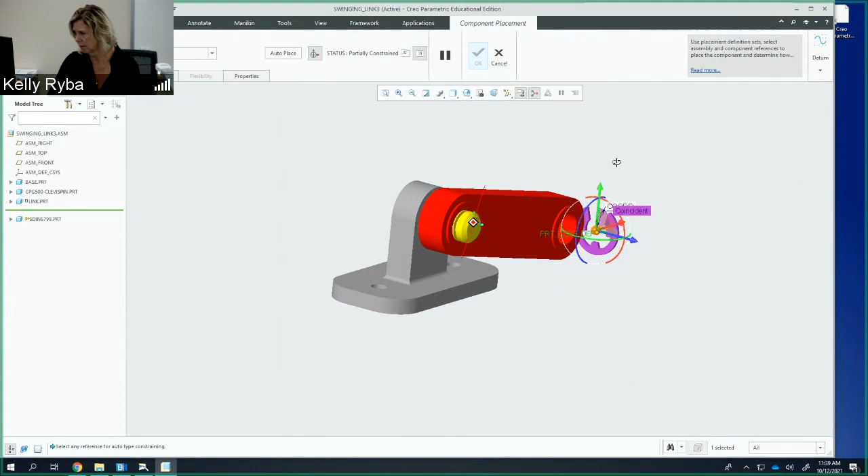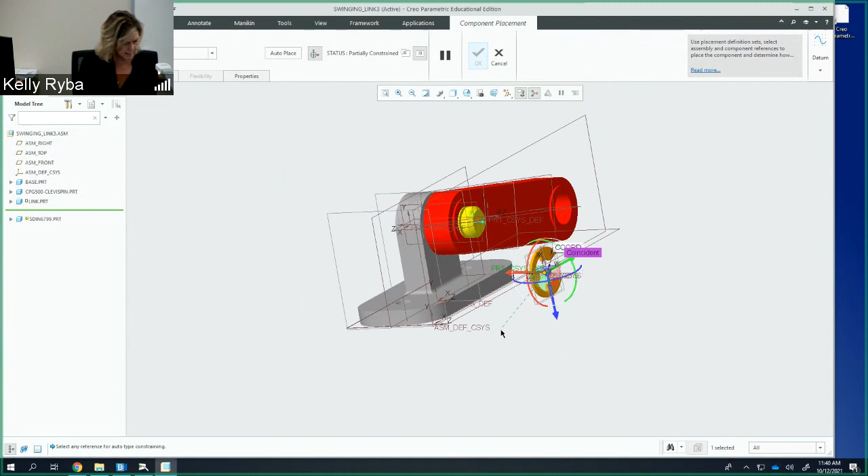The first thing I'm going to do is grab my blue arrow and pull it forward, and even though over here the arrow shows going to the right, I'll click it, but it can come back to the left. Now I'm going to rotate it around so it gets in sort of the right plane, and then rotate it so it goes this way, matching the orientation in the figure.

On page 302 at the top. So when I look at it, it's sitting something like this, so my open part is to the right here.

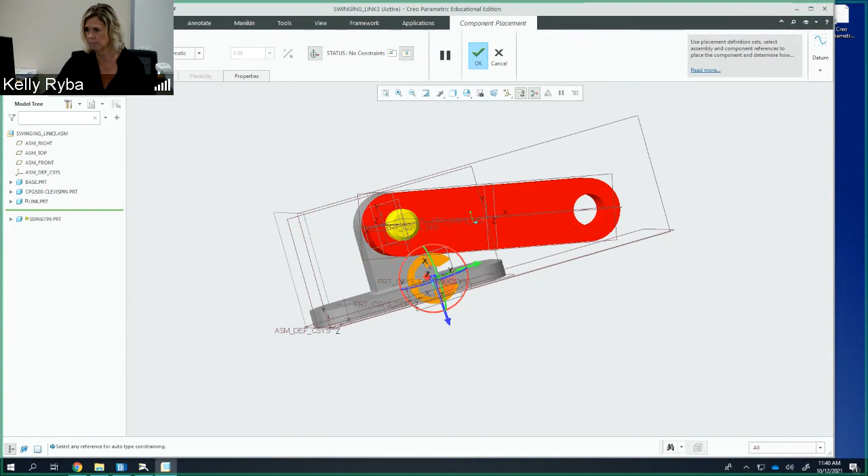Now here, what I need to do when I place this is actually set it to place manually. If you try to do it automatically, it's not going to do what it's supposed to. So, place manually, user defined, and I go into placement. Even though it's going to be coincident, and coincidences — when in doubt, start there.

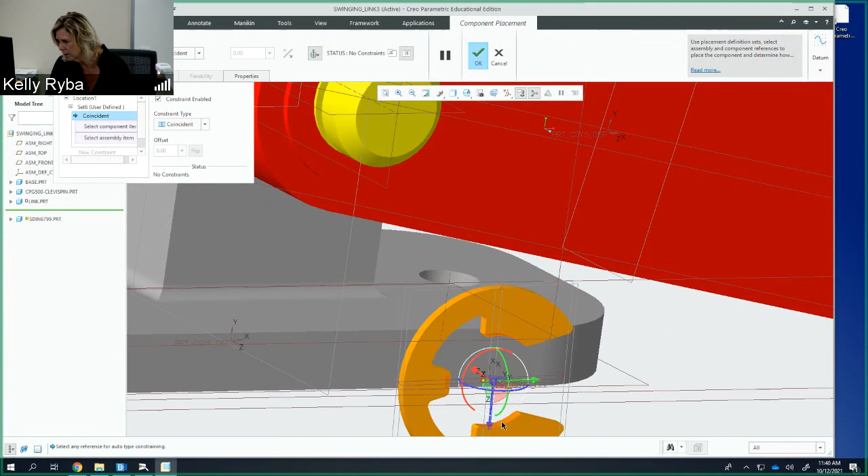I'm going to take the diameter on the inside of my clip, this surface, click here. And I'm going to put it in line with, or coincident with, right where it's going to seat on that surface right here.

So now it's pushed it into its orientation this way. And then lastly, I need to add one more new constraint, also coincident, so I'm going to set that up right away.

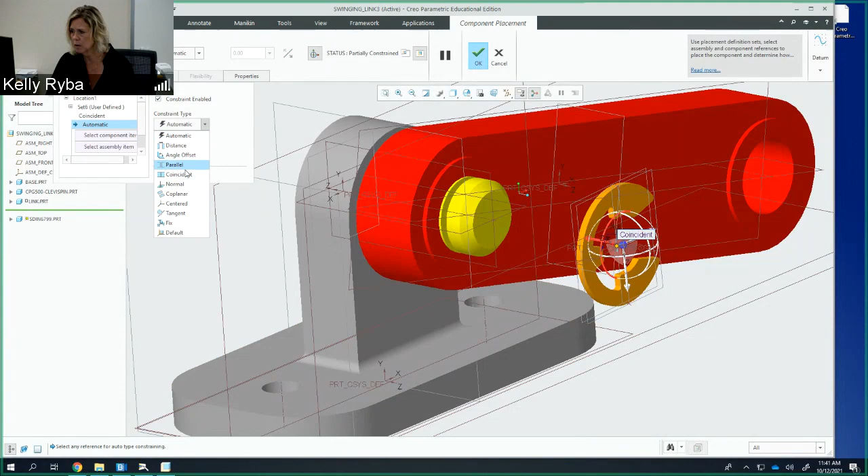I'm going to put it on one side or the other, so I'll click on this surface right here. Then I'll zoom back out, rotate this around, and put it on this surface right here. Now it moves it into position.

So let me zoom out here, and now I have everything in place. Look at that. Okay, now as soon as that's all set and it looks good, I can hit OK here. Now I can see that I have everything. Now, how come it went the other way with that? I'm not sure.

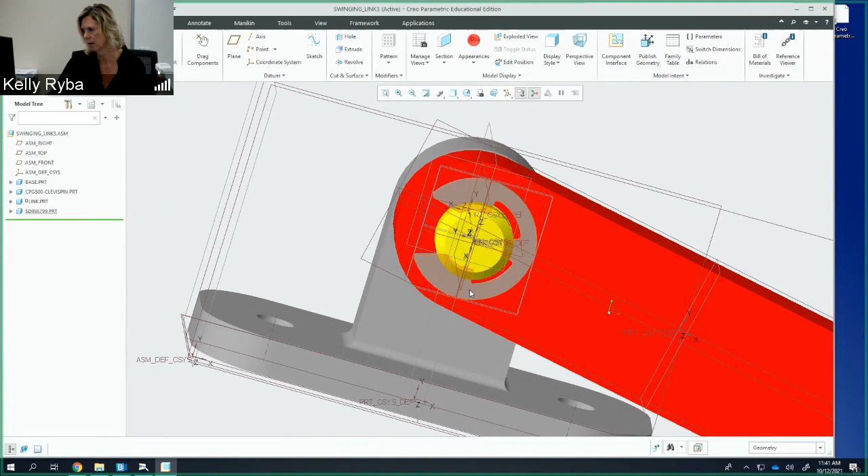The orientation of this isn't important, like where that open spot is on the retaining ring, because it's really on the groove. I'm not sure why it switched it around. I'm going to change the appearance, I'm going to make that blue.

Okay, so now you can see all my separate pieces go into a standard orientation. Let's move it around a little bit, and then we'll do that drag one more time. We're going to drag it, I want to do my link. Notice that I can still rotate that back and forth.

So good. Okay, so that is your first tutorial and the first part of the assignment that you have. Let's look at your assignment.

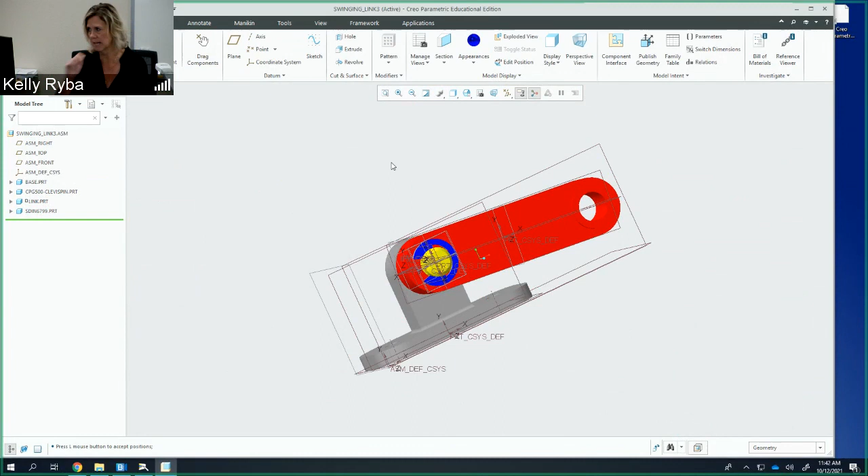I'm going to minimize this right here, and we're going to go in. Again, download these all into the same working directory so that you can work with those parts. Let me know if you have any issues at all.

Okay, then we're going to go back to our learning plan, chapter 9, and go down to the homework. So our homework assignment here are the chapter 9 tutorials, and they're these 5. The first one that we just went through is the swinging link assembly.

Now, on page 303, let's see if I still have that up. I do not want you to do the exploded views, okay? This is a huge pain. I know exploded views are nice, and I think they're way easier in SolidWorks, but I don't want us to worry about these exploded views right now. We'll work on those a little bit later. It's kind of an added thing, and it is not easy to navigate. It's a lot of playing around, which I don't want to be the focus at the moment.

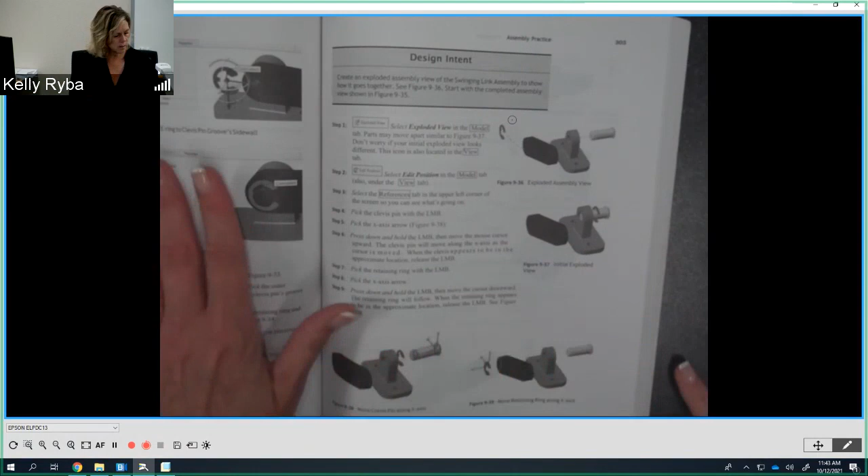So stop on the bottom of page 302, and that's going to be where we end this tutorial. We're going to skip the exploded stuff for this one, and then our second tutorial is going to be putting together this take-up frame right here. That's what I'm going to demonstrate tomorrow, among the other ones that are there as well. We'll probably get through at least 2 tomorrow, and then maybe a third one.

We'll kind of see, but I want to get through each one of these 5 tutorials that you have assigned for your homework, because these are going to be due next week Friday. So you'll have some time to work on those and have some good resources for it. Okay, so that's going to be as far as I want to go today.

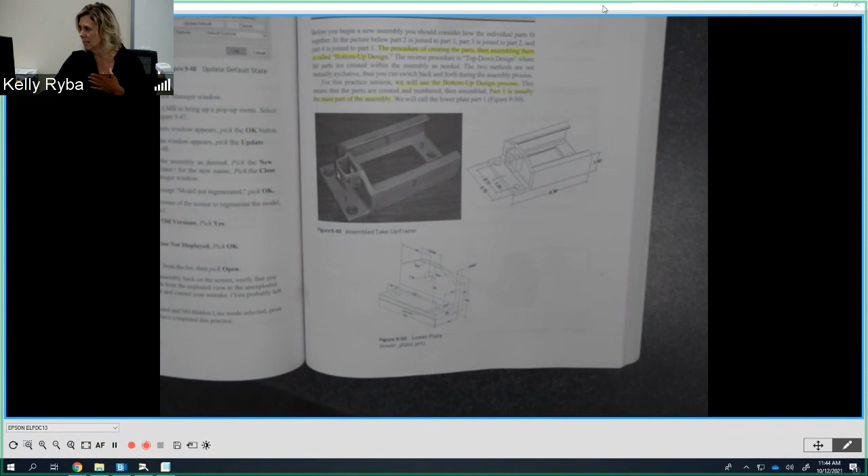Oh, let me get out of here. Let me go back over here. So according to our course calendar, we started chapter 9 today, which we actually did. We went through and looked at the syllabus and the course expectations.

Tomorrow we're going to continue on in chapter 9 here, doing some more assembly stuff of that take-up, and then I'll let you guys continue to work. As the week goes by, we're going to be continuing on to chapter 10. So I'll start populating that in, so that if you get done with the chapter 9 stuff early and want to work, especially during your break, I'll have that available for you to start on independently if you so choose.